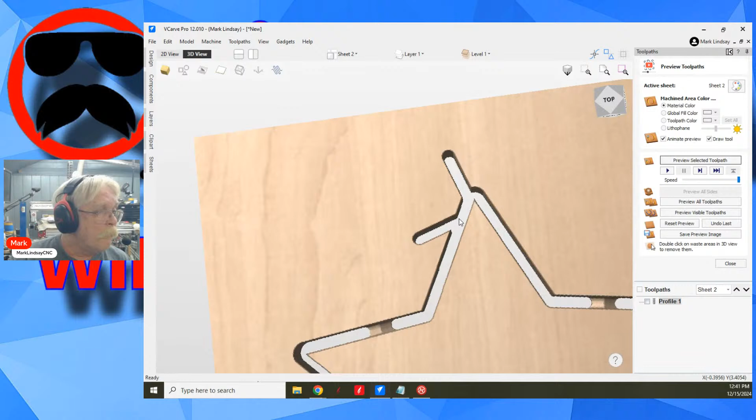So let's preview the toolpath, and I can speed that up. And there's my lead out. Here's my lead in, and it's going in that direction. So it was the fact that it was by an inside corner.

Now, it couldn't come down here and do a lead in because it couldn't go that length at a 45-degree angle and then cut it that direction. So there's the issue. I went ahead and I took the tabs off of this corner. I had put them here, here, here, and here. Didn't put a tab up here. So the lead needs to be at an outside corner.

So, man, that was a long way to go to get to that. I don't know, did that answer your question?

Am I correct that leads don't work on the final pass? Yes, sir, they do. Yes, sir, they do.

Let's go back, slow that way down, and we'll preview it. There's the lead, and we'll just take a couple of seconds. And speed it up a tad and go faster than that.

So yeah, it did go do the lead out, lift up, come back here and do the lead in. And it does do it on the final pass. So there we go. So the leads do work.

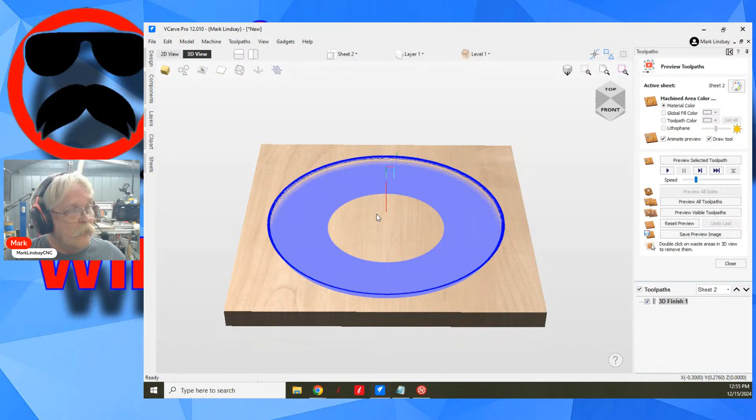Now you can put whatever you'd like in this area. We'll go ahead and we'll preview that. It's just going to go around in a circle and cut that out. That's probably going to take way too long to simulate, especially at that speed.

So it's cut out our dish, but it's left that unmachined.

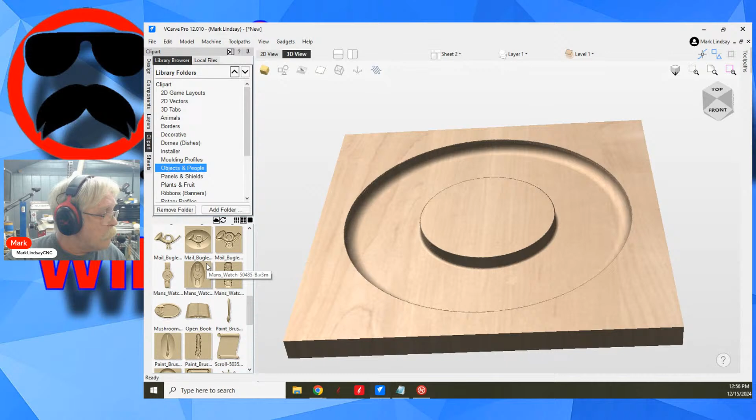Now I can come back over here onto the design side, go back into my clip art, and let's see what we got here. I don't have an alligator in this one, but let's see what I've got. Objects and people—what are we going to do here? I don't know, I need to find something neat. Soccer ball, all right.

Let's size that soccer ball down, hold down Shift until it's about the size of that center. Well, let's just do this easy—I'm going to size that component to be 5 inches. Apply, close, select that vector, and close this.

And I want to do a finishing toolpath for that one. Model thickness exceeds material thickness. My model thickness is 0.765—no, I don't want to go that deep.

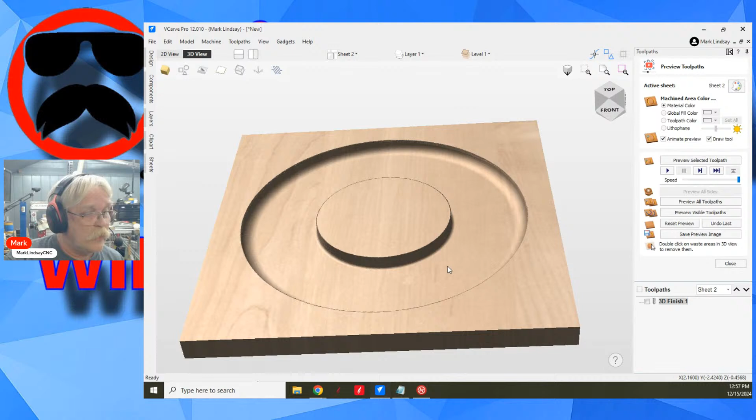I want to go—let me get out of here, cancel. I forgot I need to check back into my preview, need to check my depth. 0.4568, yes, that's the deepest I see. Let's make sure of that. 4568 is the depth, that was the problem.

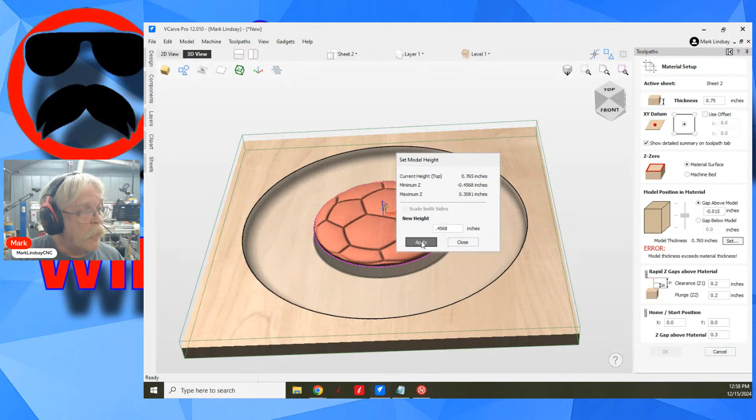All right, so I want that model to be 0.4568. I'll set my model thickness right here: 0.4568. Apply. Close. And looks good, okay.

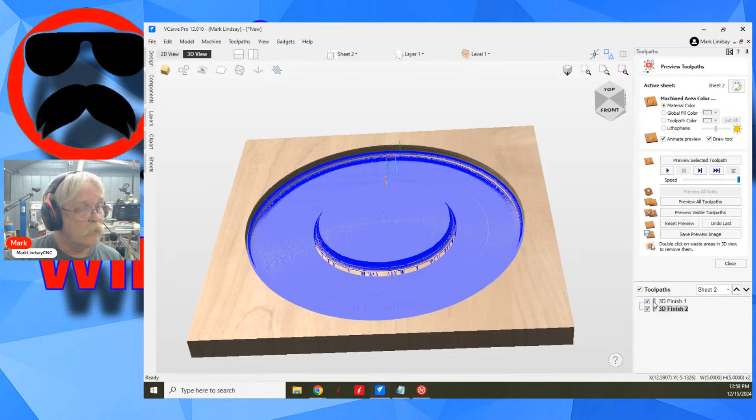Now I need to do another 3D toolpath. I want to do this one. Selected vector is my machining limit. Calculate. Let's do this one, preview that selected toolpath.

It's not nice, but you get the gist. Let's see here—I was trying to have trees and a mountain scene as the background from my cut. Oh, that's just a composite model, that's just a composite model.

I'll give you an example here. Let me—I'm not going to reset that preview. Let me jump up to the top, 2D view, click out of this, click out of that. Come back over to the 2D view, I'll come back over to sheet 1. We'll delete that star.

And I'm gonna go into sheets and we're gonna edit sheet 1. Got to select it so that it's highlighted in blue. Now I'm gonna edit that—I'm gonna change the size, 12 inches high, 24 wide, and the same 3/4 inch thick.

Okay, we're good. Now I'm going to go into clip art, and let's see what do I have from design and make? I have wildlife scenes here, so I have some mountains. Double click to put those mountains in there.